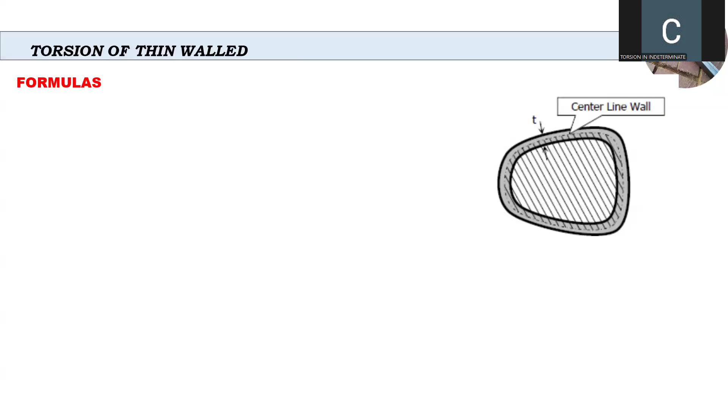So, paano ba natin to sinosolve? Simple lang naman ang formula natin dito. Ang formula lang natin dito ay T is equals to 2 multiplied by area of shear. Torsion is equals to 2 multiplied by the area ng shear, ng area kung saan mag-shear, and that is multiplied by thickness, and the thickness multiplied by shear stress.

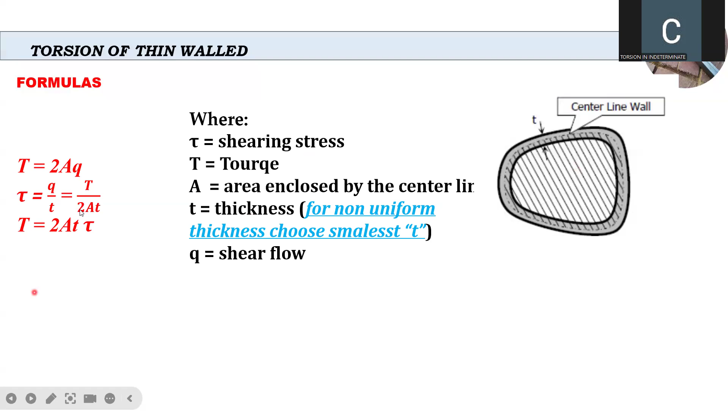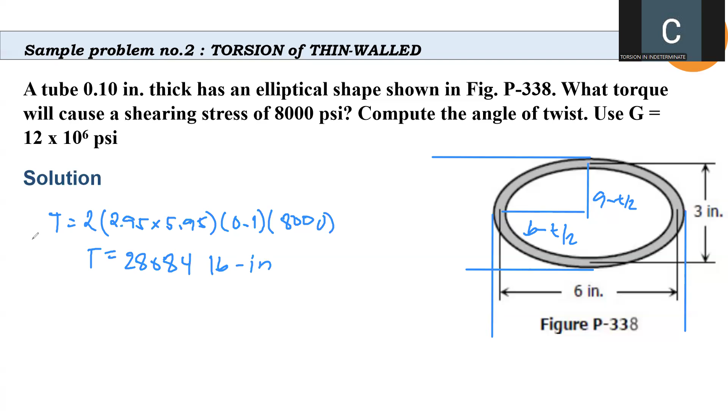So that is 2.95 multiplied by 5.95. So multiply by thickness na 0.1 and then yung ating 8,000 PSI. So torque is equal to 2 multiplied by 2.95 times 5.95 times 0.1 then 8,000. So that is equal to 28,084 pound-inches. So yun na yung ating answer. Kaya kailangan lang ay alamin natin yung area enclosed by the center line.